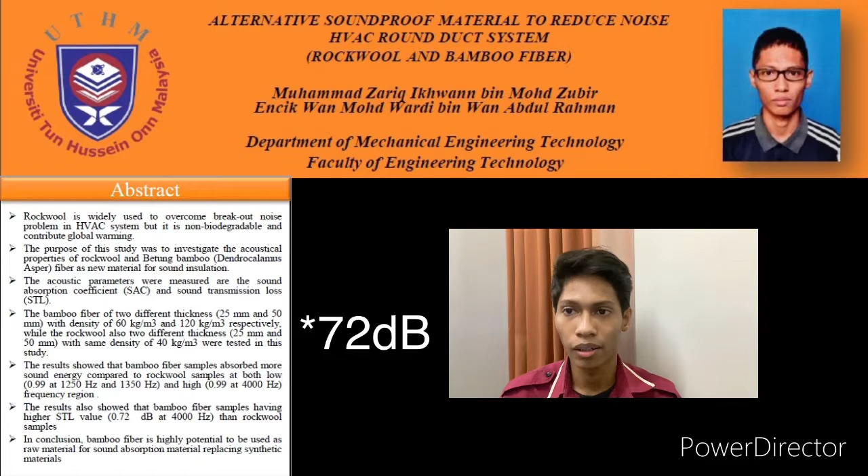The best sound transmission loss is also obtained by the 50 mm thick bamboo fiber, which is 0.72 at 4000 Hz. In conclusion, bamboo fiber has high potential to be used as raw material for sound insulation in order to replace synthetic materials.

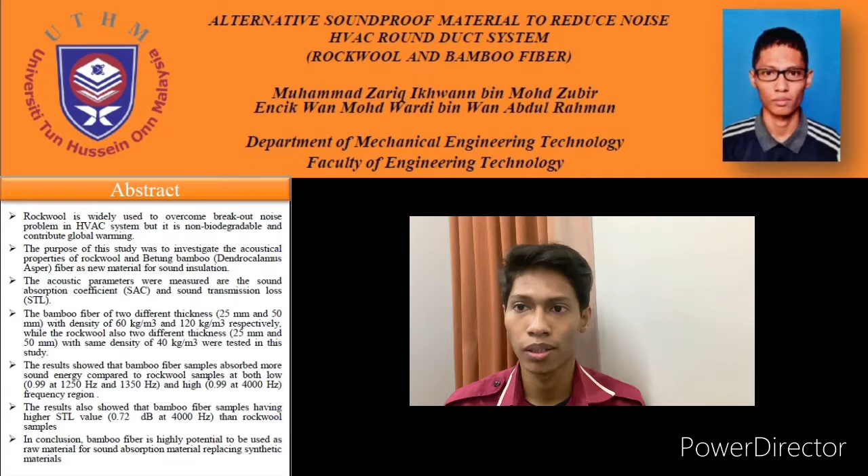Introduction. HVAC is used to comfort occupants in a building. The mission of HVAC depends on the outside condition of the building. If the outside is hot, the air in the building needs to be cooled to achieve thermal comfort. Malaysia is basically hot, so we need to cool the air before distributing it into the building. Unfortunately, HVAC in the building produces a noise problem, so we need to counter the noise to achieve acceptable noise levels in the building.

The main target of this study is to overcome the noise problem by applying external sound insulation on the air duct. This study focuses on finding an alternative soundproof material able to replace previous soundproof materials, which are rockwool and glass fiber, because they have a bad impact on our health and environment.

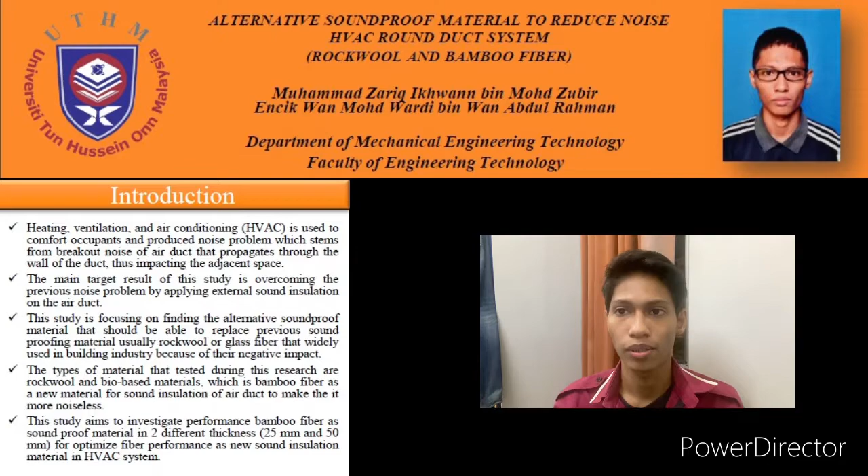The materials we tested during this research are rockwool and a bio-based material, which is bamboo fiber. This study aims to investigate the performance of bamboo fiber as a new sound insulation material to be applied in HVAC systems.

Now the objective section. This study has three objectives. First, to minimize the breakout noise produced by air ducts in HVAC systems by using natural soundproof material. Second, to investigate the sound absorption coefficient and sound transmission loss of rockwool and bamboo fiber. Third, to compare the ability of rockwool and bamboo fiber as soundproof materials.

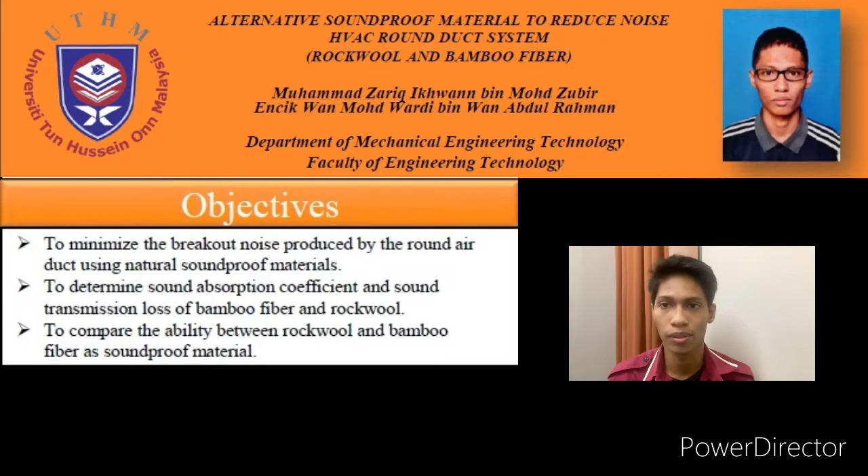Literature review. Air ducts are used in HVAC systems to deliver air into occupied space, but these air ducts produce breakout noise. To overcome this noise, we should apply exterior sound insulation on the air duct. Next, Asdrubali reported that rockwool is widely used in the building industry for sound and thermal insulation. However, this fiber is very dangerous to the environment because it releases a lot of carbon dioxide that leads to global warming. It is also hazardous to human health if inhaled or exposed to the skin.

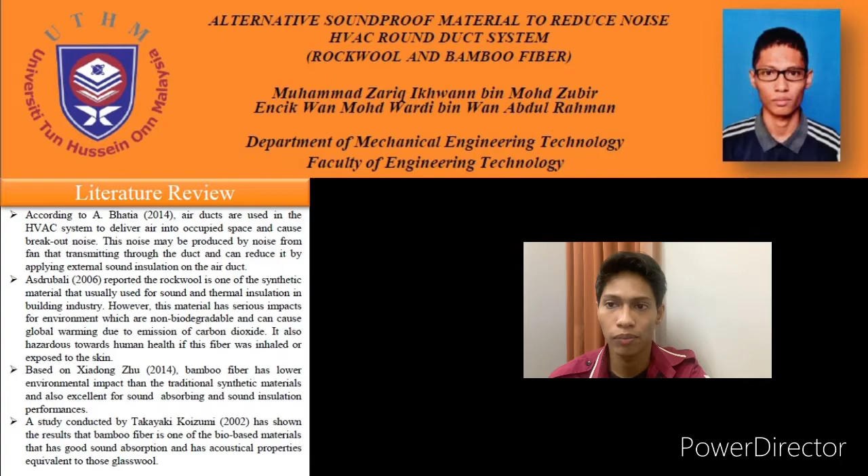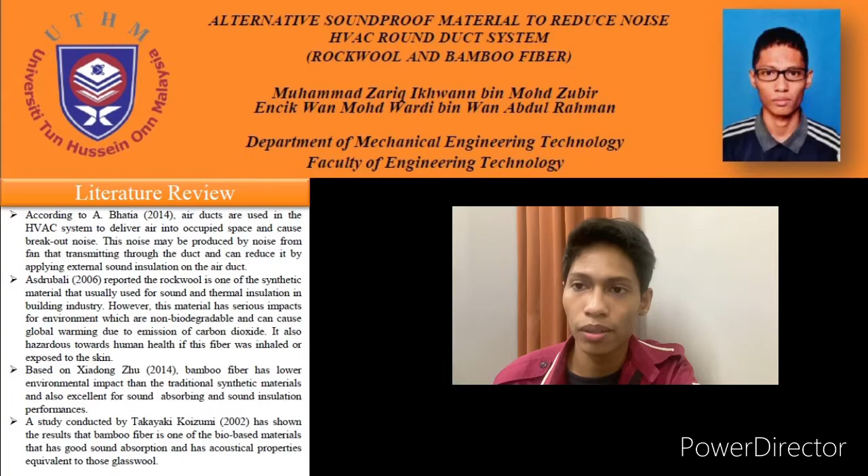Next, Xiadong Zhu reported that bamboo fiber has a lower impact on the environment than synthetic fiber, and it is also good in sound absorption. Another research on bamboo fiber by Takayaki Koizumi mentioned that bamboo fiber has good sound absorption and acoustical properties equivalent to those of glass wool.

Now we go to the methodology. This study has three steps for the methodology: first, material preparation; next, measurement methods; and the last one is the comparison section.

For the bamboo fiber preparation, the bamboo species used in this study is Betung bamboo, known as Dendrocalamus asper for its scientific name. I bought the bamboo locally in Terengganu. The bamboo needs an extraction process to turn it into bamboo fiber. The extraction begins with soaking the bamboo in a mixture of water and sodium hydroxide for 1 or 2 days to make the bamboo soft. After that, dry the bamboo fiber under the hot sun to remove its moisture.

After removing its moisture, I use a hot press at 180 Celsius and a pressure of 1000 psi to turn the bamboo fiber into two different thicknesses, which are 25 millimeter and 50 millimeter. After that, I weigh the bamboo fiber to determine its density.

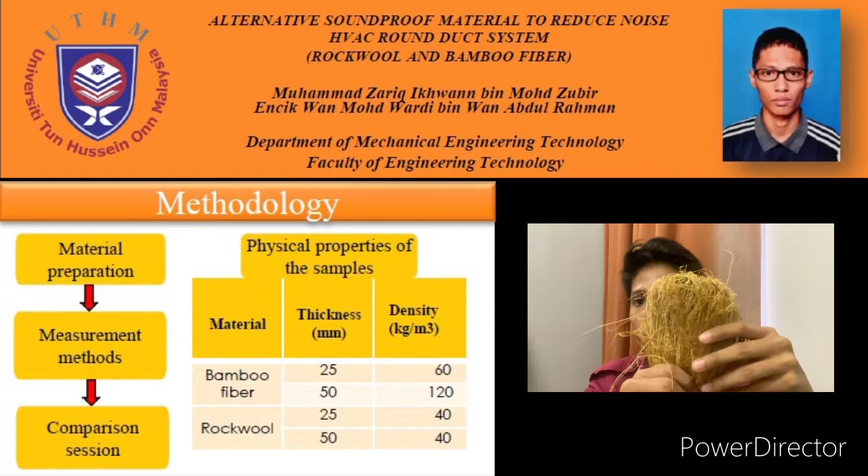So this is an example sample to show you the fine diameter of bamboo fiber. You can see this is bamboo fiber after the hot press. For the rockwool, I just bought it on the market with a thickness of 50 mm and 25 mm, and the density for both thicknesses is 40 kilogram per meter cube. So this is rockwool.

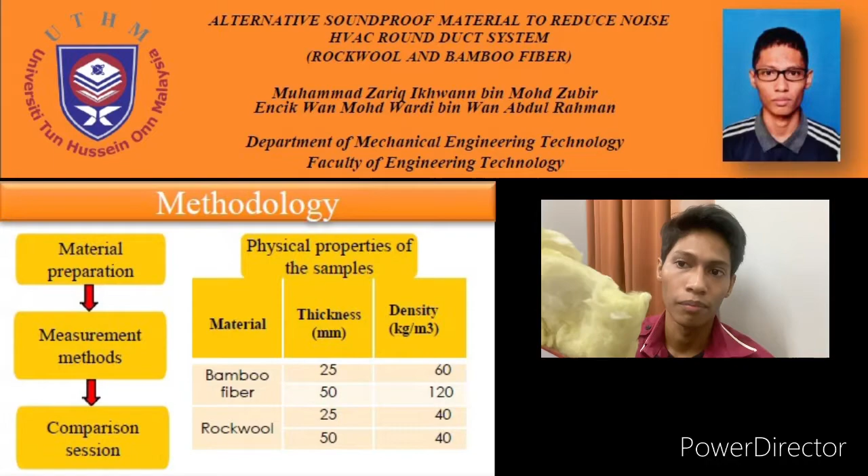Okay, next I will explain the measurement methods. In this study, there are two measurement methods used. First, sound absorption coefficient, and the second one is sound transmission loss. For the measurement of sound absorption coefficient, I use an impedance tube according to ISO 10534. This tube is divided into two different diameters, which are 28 millimeter and 100 millimeter.

So basically the frequency range is also divided into two groups, which are low frequency and high frequency. The 28 millimeter round tube is for the high frequency range from 2000 hertz to 6000 hertz, and the 100 millimeter round tube is for the low frequency range from 150 hertz to 1550 hertz.

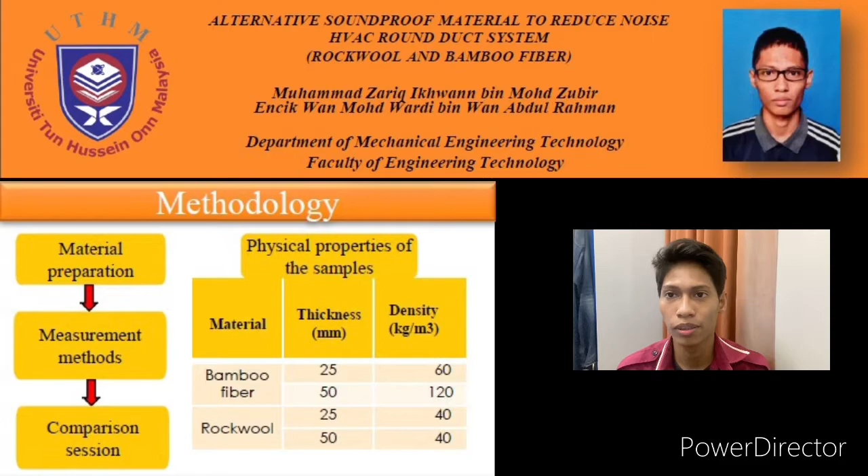For the sound transmission loss, I use 1/3 octave band, and the frequency range is 125 hertz to 4000 hertz according to ISO 140-3. This measurement is carried out in a reverberation room.

Okay, the last step of the methodology is a comparison session. This session compares the ability of rockwool and bamboo fiber as a soundproof material, basically to determine which is better to be used in an HVAC system in order to reduce the noise.

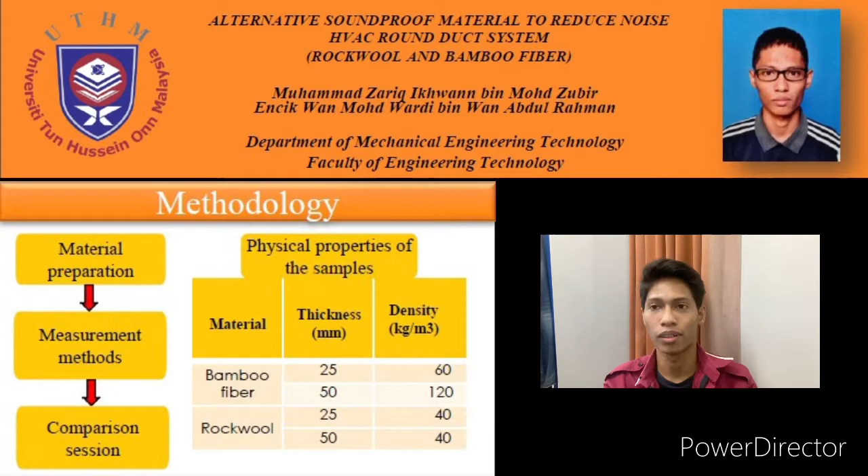The results show the sound absorption coefficient of rockwool and bamboo fiber with the same thickness of 25 millimeter is almost the same at the low frequency region. The maximum obtained by 25 millimeter bamboo fiber is 0.53 at a frequency of 1550 Hz, while the maximum sound absorption coefficient for rockwool is 0.51 at a frequency of 1550 Hz.

The result for 50 millimeter thickness of rockwool and bamboo fiber shows different values of sound absorption coefficient at the low frequency region. The sound absorption coefficient of bamboo fiber is higher than that of rockwool. The maximum achieved by bamboo fiber is 0.99 at frequencies of 1250 Hz and 1350 Hz. But when reaching the frequency of 1550 Hz, both samples have the same value, which is 0.98.

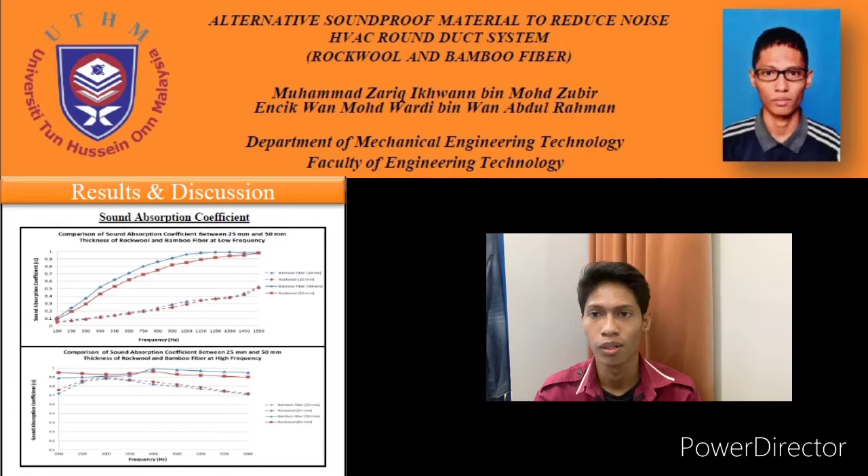Now I will explain the sound transmission loss result. The sound transmission loss of 25 millimeter thick bamboo fiber is slightly higher than 25 millimeter rockwool. The maximum sound transmission loss of bamboo fiber is 36 dB, while the maximum for rockwool is 35 dB.

For the 50 millimeter thickness of rockwool and bamboo fiber, the sound transmission loss of bamboo fiber is higher than that of rockwool. The maximum sound transmission loss of bamboo is 72 dB, while the maximum for rockwool is 70 dB at the frequency of 4000 Hz.

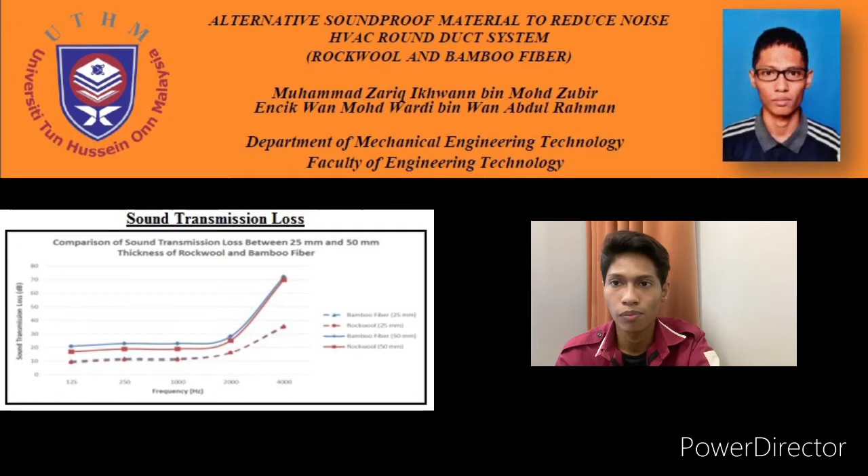In conclusion, this study has proven that bamboo fiber is a good material in sound absorption coefficient and sound transmission loss compared to rockwool. The maximum sound absorption coefficient obtained by 50 millimeter bamboo fiber is 0.99 at frequencies of 1250 Hz, 1350 Hz, and 4000 Hz, while the sound transmission loss value is 72 dB at 4000 Hz.

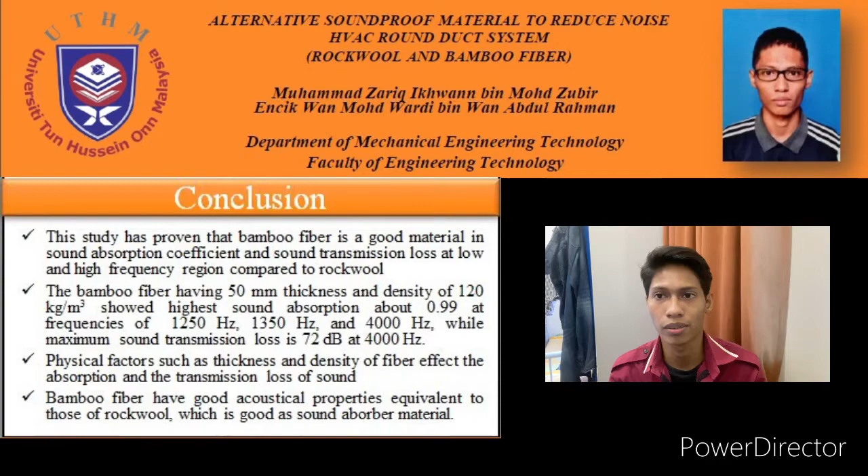The physical factors that affect sound transmission loss and sound absorption coefficient are the thickness and density. This study also proved that bamboo fiber has acoustical properties equivalent to rockwool, which makes it a good sound absorber material. Based on the positive performance of bamboo fiber, we can use bamboo fiber as a new material for sound insulation in HVAC systems to replace rockwool and glass wool.

So this is the reference that I use.